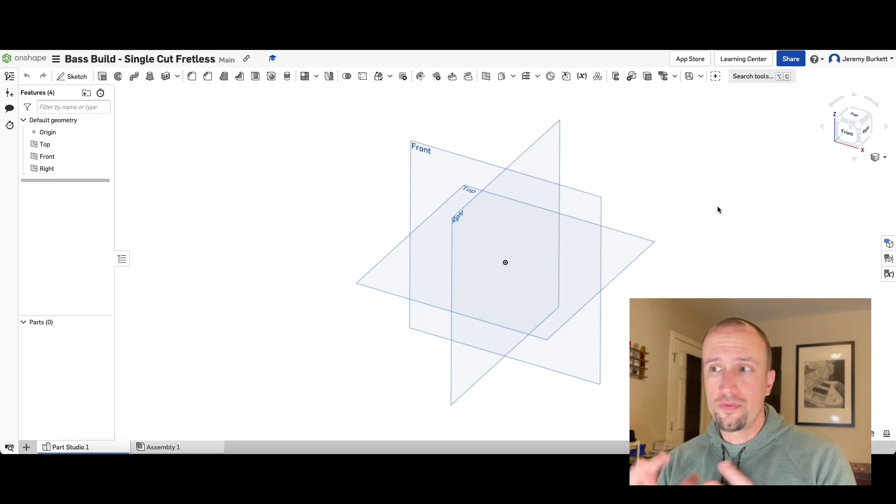You can see here that we are actually going to start from a blank canvas. That's what you're seeing here. We need to build 4 parts for this particular design that I've got in mind. I'm going to structure this video where I'll kind of describe the parts as we go, and then I'll fade out and cut it into a time lapse so you can see it all happening on the screen. Because some of it takes a while, I don't want you sitting there and getting bored.

Now, one quick note about what I'm using. I'm actually using Onshape, but that is only one example of the many types of software out there. So if you want to try this for yourself and you have access to a different type of program, that's totally fine. You'll just kind of see how I approach things.

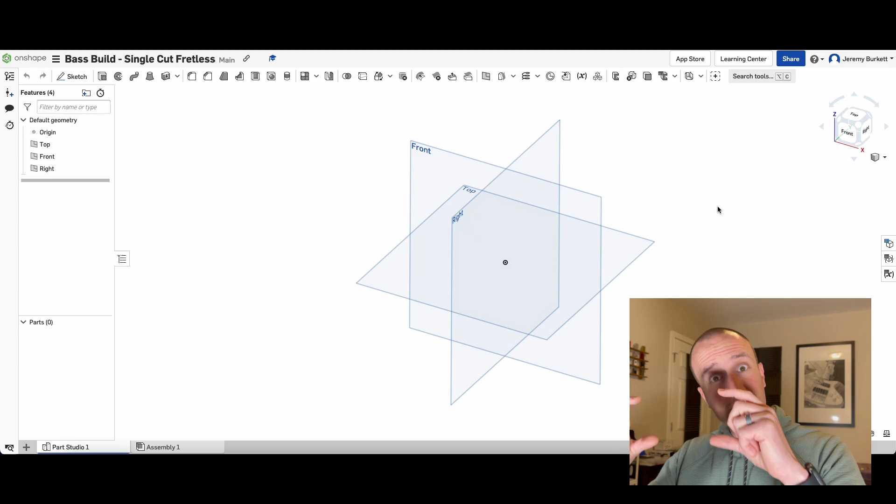All right, the first part that I need to make, I'm going to start with the outer housing. That's kind of that big shell casing, usually rectangular shaped, that everything else fits into. The reason I do that is because if I can get the dimensions of that set, I can then use that part itself as almost a template for all the parts that I need to fit inside of it, and it makes things a little bit easier. So that's what I'm going to get going here. Sit tight, enjoy the show, and I'll be back in a sec to talk about it.

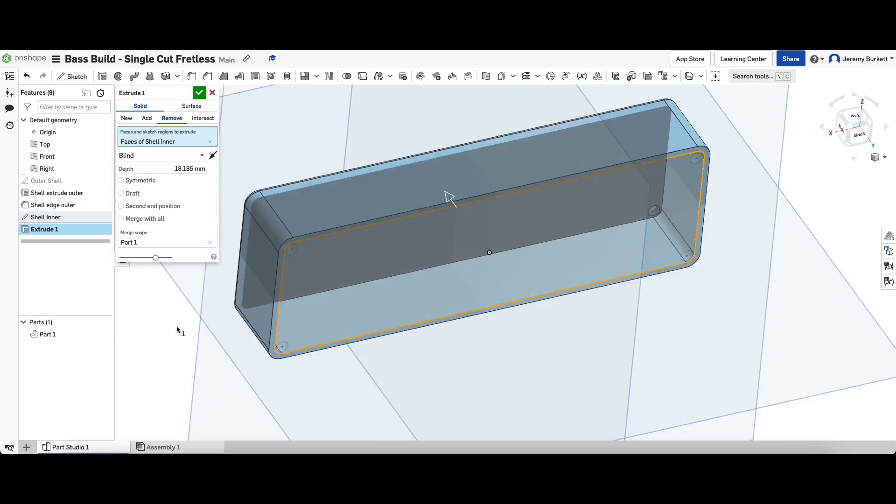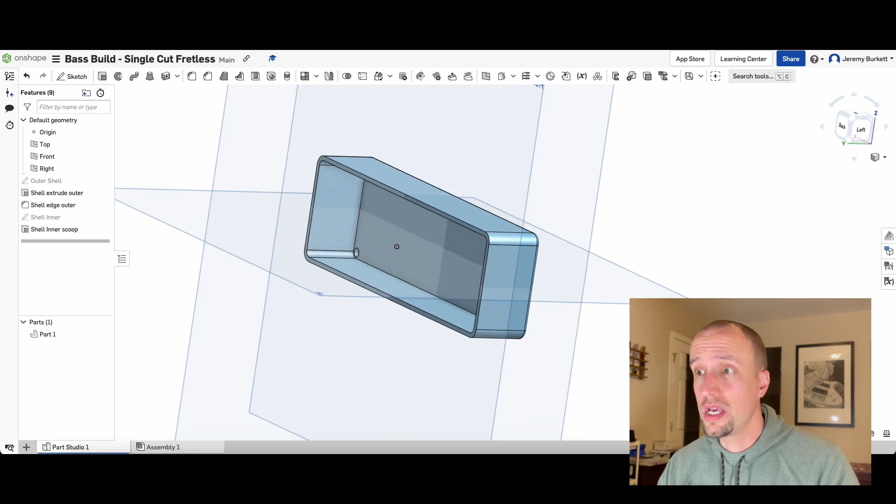There is our first part done. As you can see, we've got that outer shell. You'll notice as I was going through, there's only a few operations that I really had to do. I started with a basic rectangular shape, and then I used some of the circle tools to place the holes where I'm going to put my mounting screws. And I also used the same circle tools to round off the edges.

Once I made the outer rectangle, I just extruded it. That just means thicken it out to a three-dimensional block. Then I made a second rectangle, slightly smaller, with the dimensions that I wanted for the walls. And then instead of extruding it and making it solid, you can invert that feature. You can extrude it and make it subtract. So it ends up scooping out the inner part, and that's what we've got here on the screen.

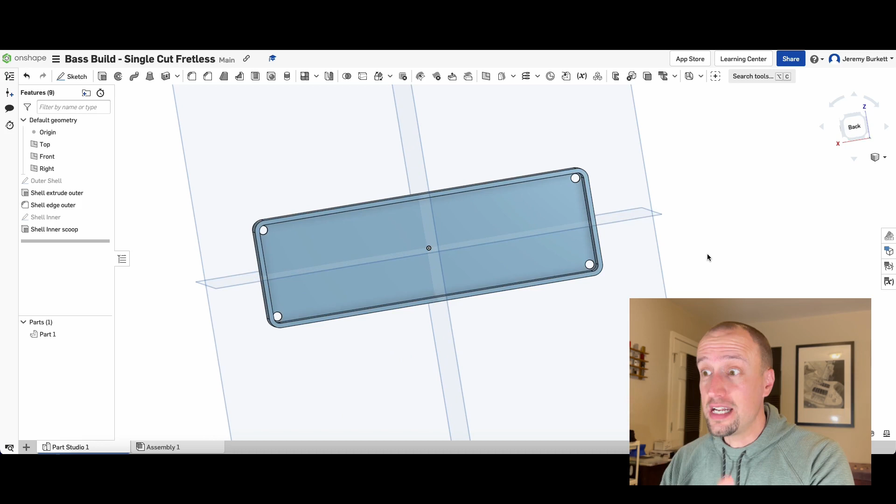Now, like I said, this is always my first thing because I can now use this part that's already there, and I can start to build my next parts and use these dimensions and all the simplifying tools that they have. So the second part, I'm going to build the bottom cover, so it's got to line up some of the holes and everything.

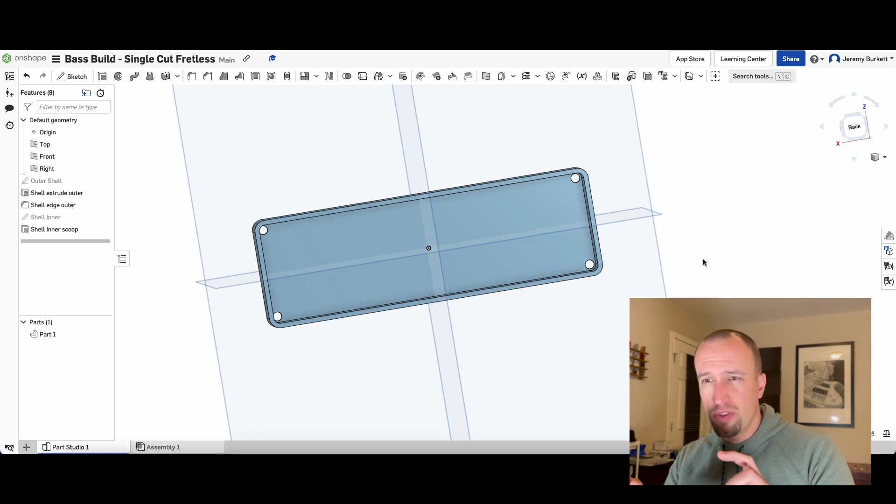I didn't mention before, but I am using this 4 screws in the corners method. Typically and more traditionally, you'll see pickups only have 1 screw on either side. But I've had some trouble with that in the way that I wind my coils. I end up just needing a little more space on the sides, so I'm moving my screws out to the corners for this particular build. So here's what I'm going to do. I'm going to get that back cover made, and then we'll come back and talk about the next part.

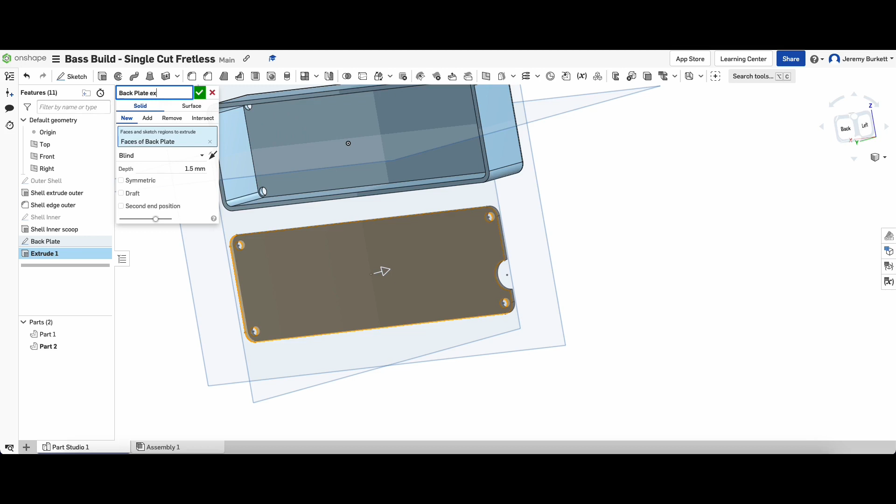Okay, we got our second part done. As we said, this is the back plate that's going to sandwich everything. Once we've got all the internal guts in there, we want this to come along and cover everything up.

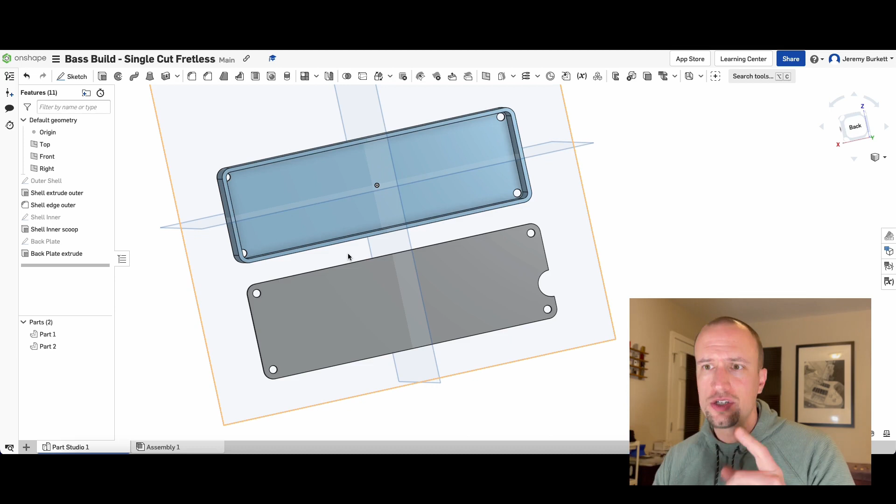A couple notes about this. You'll notice it's all the same dimensions as the largest dimensions of that first part we made, and by using those center points, it's so much easier to come back with the tools in the software to quickly reproduce a lot of those circles so they perfectly match up with the screw holes in the corner.

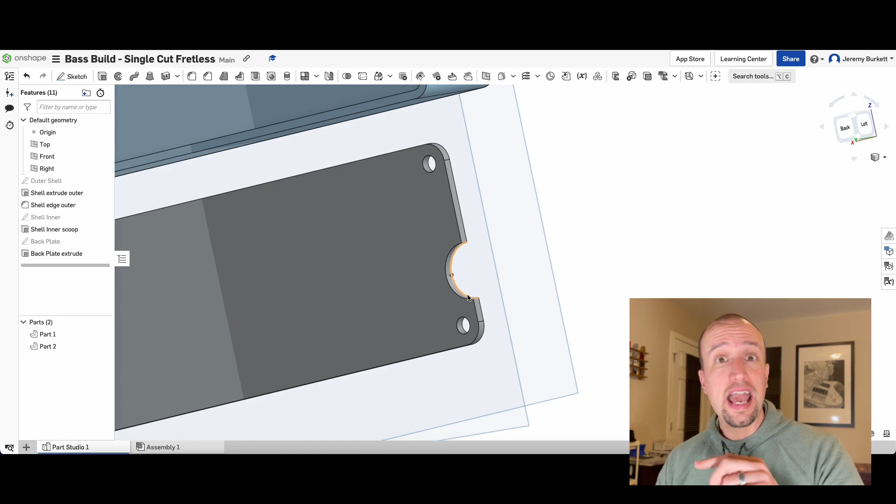Now you notice one of the features here, if I zoom in, I've got this little half moon shape. That half moon shape is there to allow the wires to come out. We're going to have a signal wire and a ground wire coming out of our pickups, so we can't have a completely enclosed shell. We need somewhere for those wires to come out.

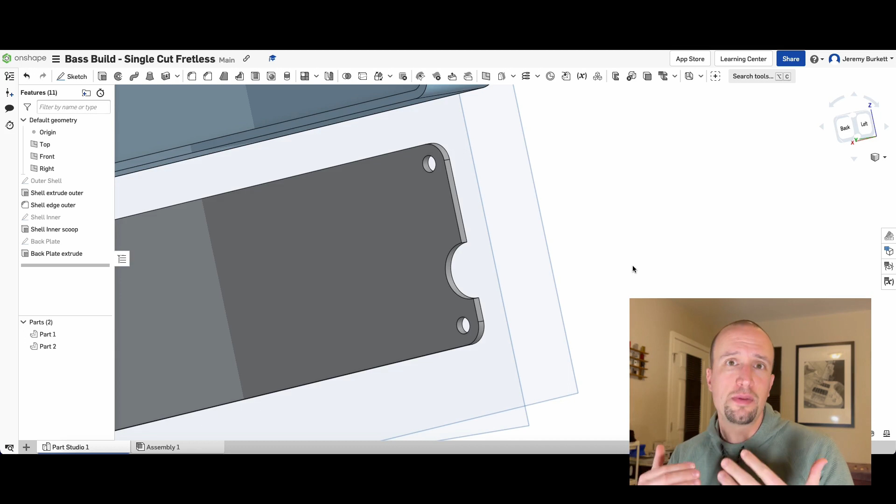Now, the beauty of this is because the whole part is perfectly symmetric, depending on where those wires end up coming out, I don't need to put a half moon in a specific spot or know which side it's on, because I could take that back plate and flip it upside down or right side up, left or right, and all of the screw holes are going to match up because it's a symmetric piece. That's another really nice thing about doing this kind of design process.

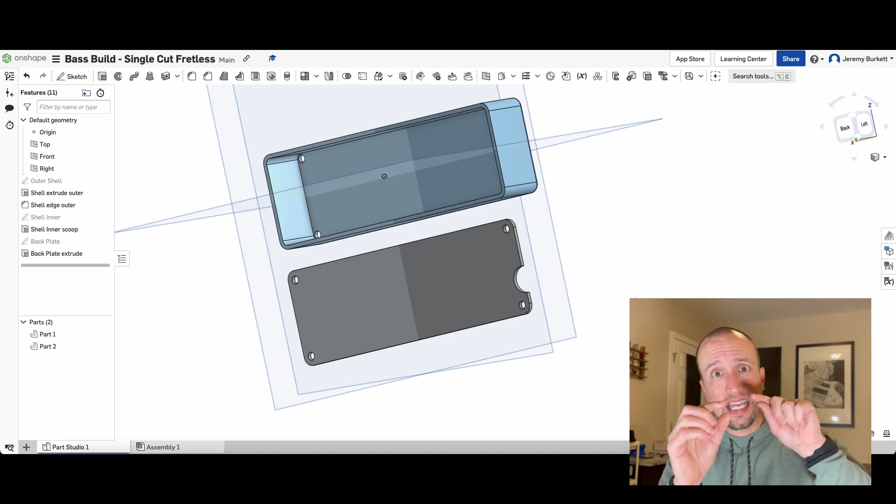All right, the third part we're going to make is a bobbin piece. The bobbins are the internal, it's like two sandwiches, so they're very thin, kind of like this back plate, but they're going to have all the spacings where we're going to insert our magnets, or the magnet pole pieces that we use. We need to have dual magnets. I like, in my single coils, to have a magnet on either side of the string. So we got to line up circles for that, and then we've got to space it out.

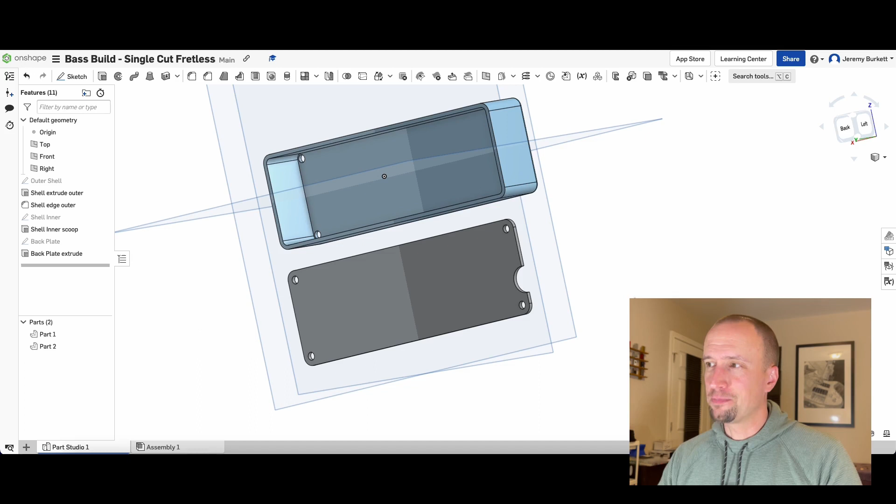This is a 5-string design, so we've got to space everything out at the correct string spacings, and you'll kind of see that as we go. All right, we'll get on to that, and we'll come back and talk about it a little more after we get done. All right, here we go.

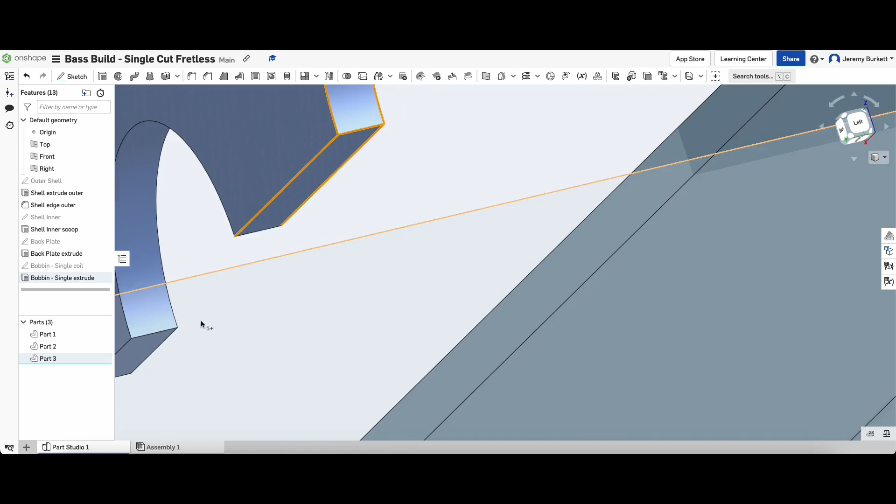Our third part is all sorted and finished. As you can see here, it's kind of like we talked about. There are these sets of holes that go down, and using those tools, I was taking a lot of time, using the dimension tool that Onshape has to make sure I could input exactly the sizes of the circles and then exactly the distance from the center of one set to the next. The string spacing on the bridge that I have is just a little under 19 millimeters, so I was at about 18.8.

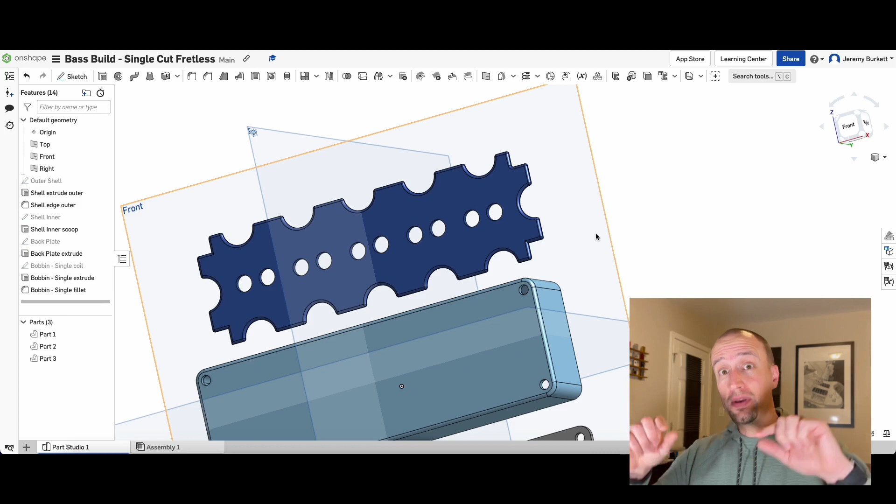It's super easy in software like this to just tell it to put all those things starting at the middle, which is a nice thing about a 5-string - there's always one string right in the middle - and then move out 18.8 millimeters on the other sides. Now you also see I did a lot of these half moon shapes all around the edges, in addition to notching out the 4 corners, so that when it's shoved up in there, those screws can go all the way down from the corners and not interfere with anything.

Well, the reason I did all these half moon shapes out here is more of an economic choice. We're going to be 3D printing these, and the bobbins themselves just have to have those holes lined up with the top one and the bottom one. But in terms of material, it doesn't need to be solid. And because 3D printers use plastic filament, this is economic - you're actually saving material and saving money by carving out any substance or material on the part that you don't technically need.

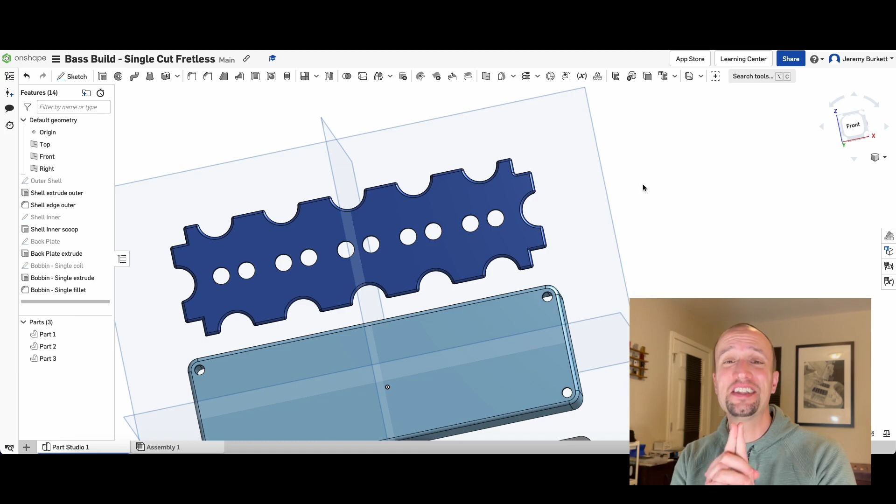That's a common thing I do to a lot of mine, just to be economic about the whole process. Now, I keep saying that I need a top and a bottom. The good news about these is they're completely symmetric, so I can model just one and send it to the 3D printer and tell it, print me 2 copies.

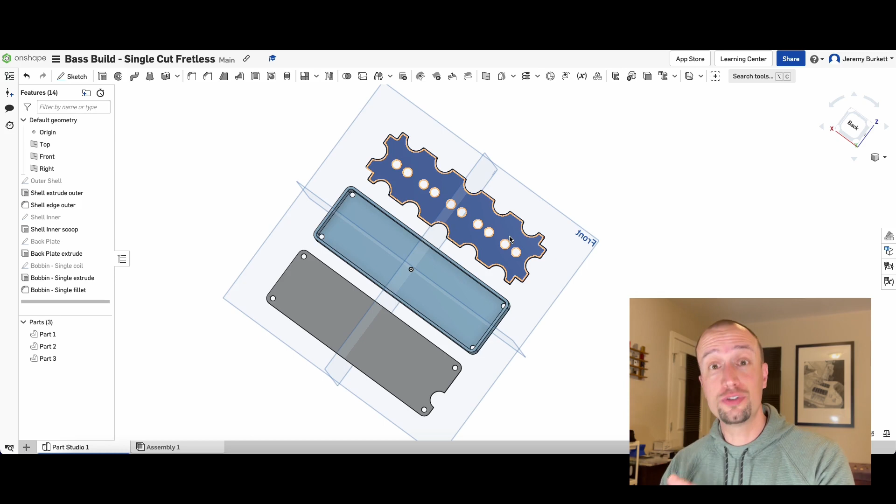These are all the parts for a single coil pickup. What I have in mind for this build is a little creative. I want to also build a humbucker pickup, but specifically want it interchangeable in size, using these same housings, so an observer looking at the base wouldn't know if it's a single coil or a humbucker inside. So the 4th part is a half bobbin that only occupies half the internal space, cut down to 1 magnetic post per string, letting me experiment. If I like the single coil sound better, I can make a second single coil, or if I like the humbucker sound better, I can make a second humbucker. That's kind of the creative twist to this.

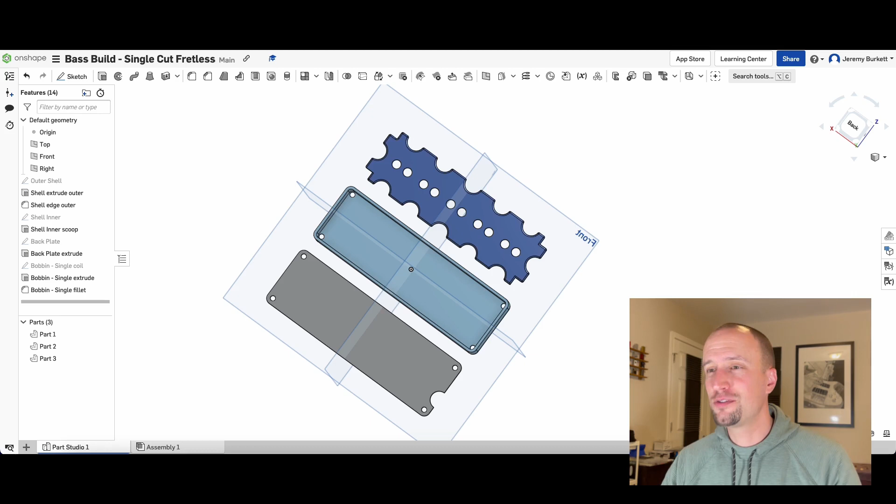As you can see here, I'm going to start just like I've done with all the other pieces, and then come back at the end to wrap up this video.

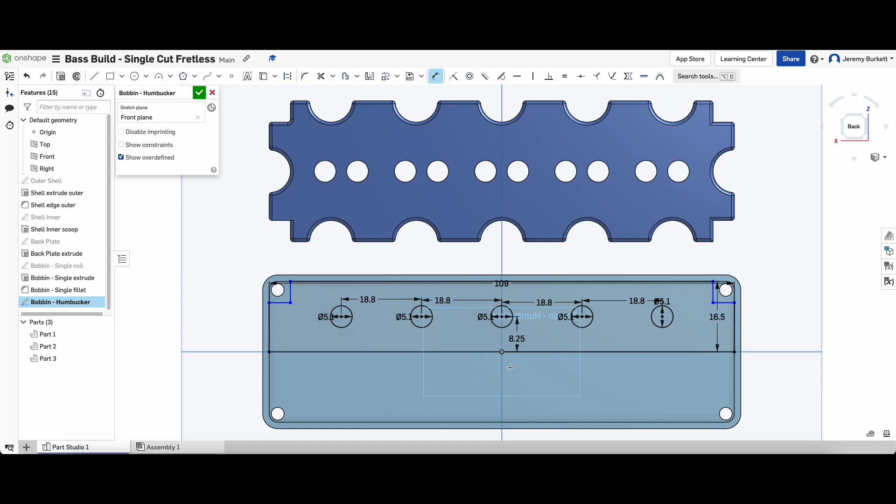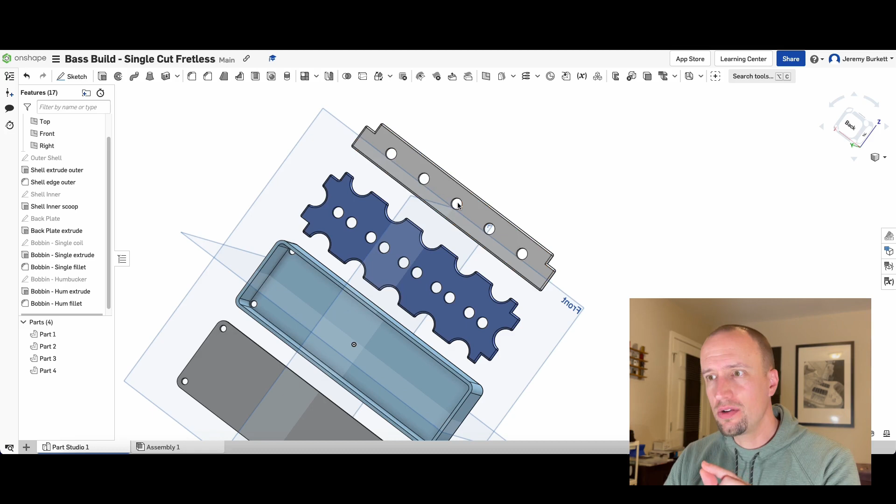Okay, that is our last part. We've got all 4 things we need for this custom pickup project. As I was talking about before, for this humbucker, I've only put single holes in this piece. The reason is that with 2 coils, you still get the same number of magnets, but by making it half as big, I can make a tiny sandwich and wind this coil independently. I can print out multiple parts, make a second sandwich, wind them, and wire them together to make the humbucker. The dimensions are such that 2 of those together, like a humbucker normally sits, would still fit into this overall housing.

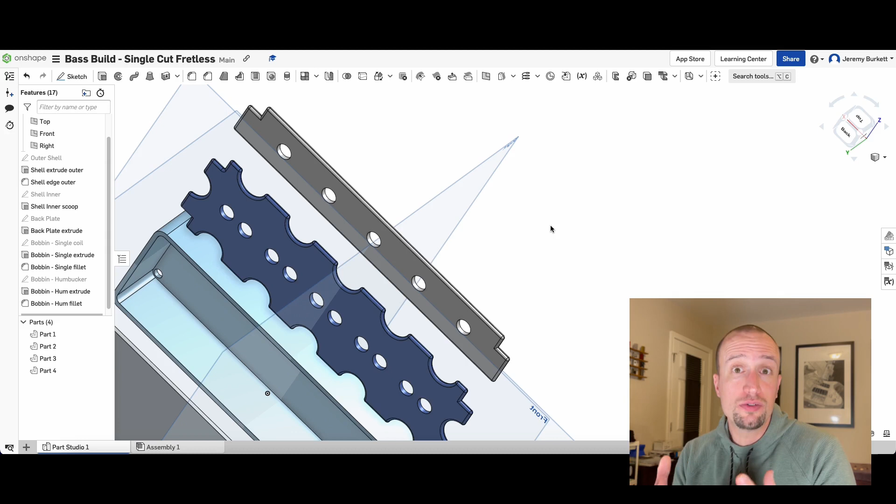All in all, this really is a quick and easy way to custom design parts for any kind of build you have. You can get crazy with your dimensions, or you can get pretty standard like this.

The last note I'll make is that I've gone through and specifically made all the edges rounded over and curved. That's just a little pro tip. If you're going to try this out, rounding out your edges, even though they're the exact dimensions, can really help in the sliding in and sliding out.

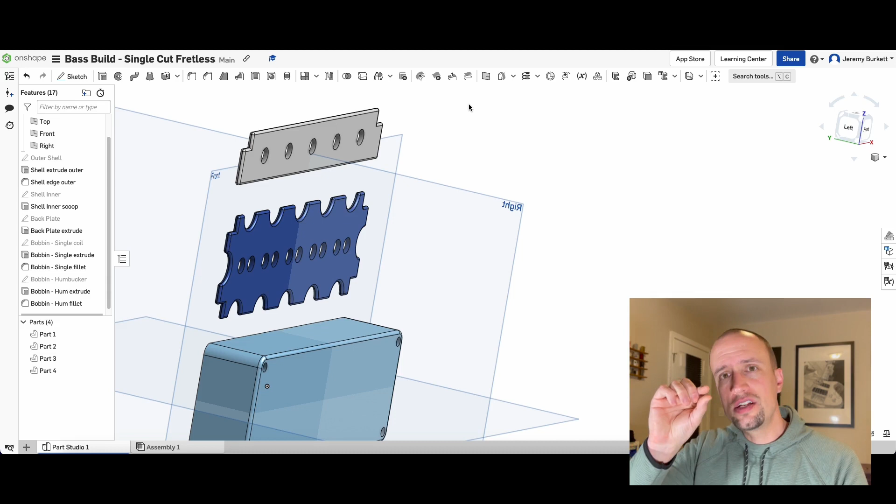When you have a whole wind of copper wire and magnets and everything, even though the dimensions are exact to each other, if those edges are flat, that's more surface area that drags on that outer shell. By rounding them out, you reduce the surface area, so only a tiny fraction touches the side. That way you can test fit things and pull them out if you need to, and remake something if that happens.

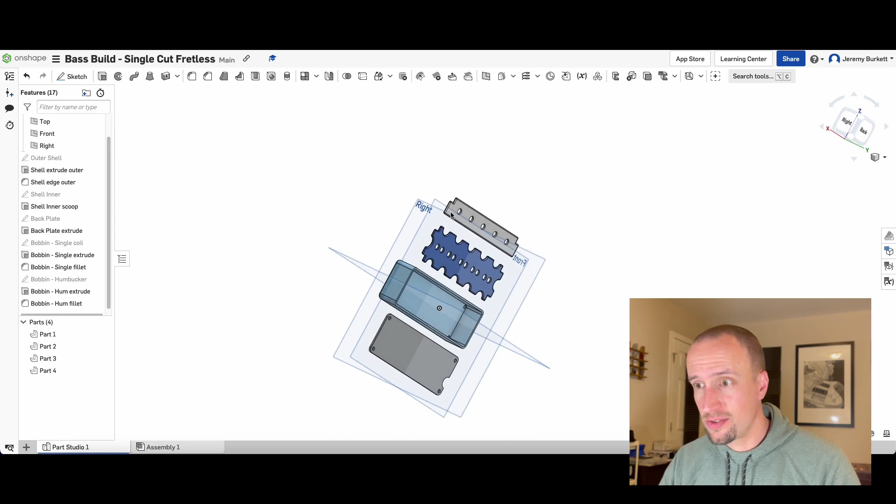Well, just to scroll back out here, that's kind of the project from start to finish. That's how I go about designing my parts for these custom pickups. As I said before, you only have to do these things once, and you can tell the printer how many copies you want. I'm going to have 2 pickups in the bass, so I'll print off 2 of the shells and that kind of stuff.